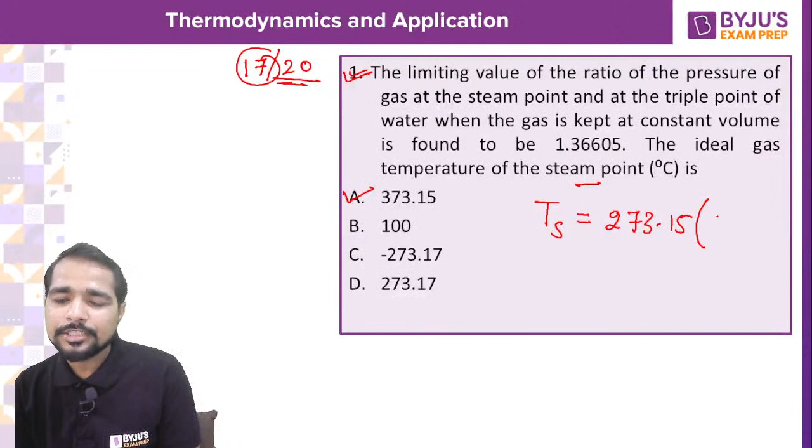These are few points I have just written. So when you will solve this problem, the ideal gas temperature of the steam point, first of all, I'll give you the answer. So temperature at the steam point must be given like this: 273.15 into P at steam point divided by P at triple point. If I write the entire value, then this value will be equal to 273.15 and this value is 1.366 something. So if I write the value, you will get the answer like this,

273.15, right? But again, very carefully, just read the last line of any numerical. Spider-Man, galat hai answer. Ankit, absolutely wrong answer. Because when you calculate the answer with the concept of triple point, then answer in the final form is in Kelvin. But in this question, it is asked in degree centigrade. Can you tell me the answer? What is the correct answer? Spider-Man, change your answer. Parvinder, change your answer. Ankit, yes, change your answer.

So always when it is a numerical problem, then focus on the last line of the question specifically. Last line जो आपने लिखी है उस पे जरूर फोकस करना, otherwise you are going to do a mistake in the question. Definitely chances हैं. Okay? Yes, Ankit, Parvinder, very good. Yes, Spider-Man, very good. B is the correct answer. A is not a correct answer. These few mistakes you have to minimize, right? If you are going to prepare for the BARC exam.

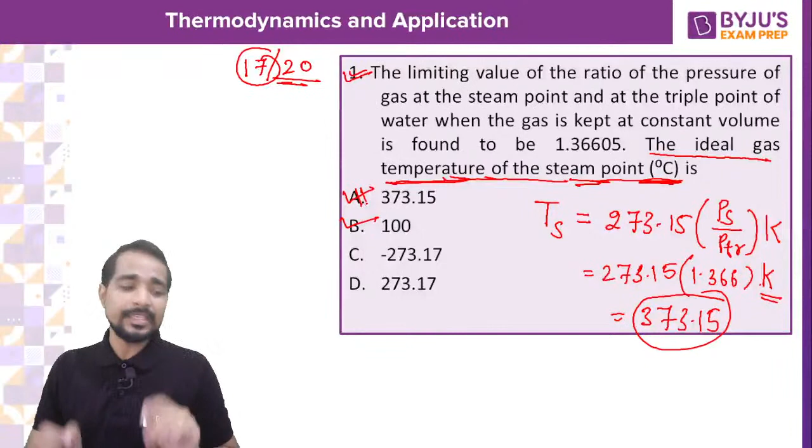और ये 7 दिन ही है. In next 7 days you need not to study much more other than the syllabus what exactly you have studied. Maximum time आपको जहां से जैसे मिले, Spider-Man, do the practice only, solve the number of questions only and just start to get few points from your mistakes. ये मुझे पता चल गया हर न्यूमेरिकल क्वेश्चन में लास्ट लाइन मुझे बहुत जरूर पढ़नी है.

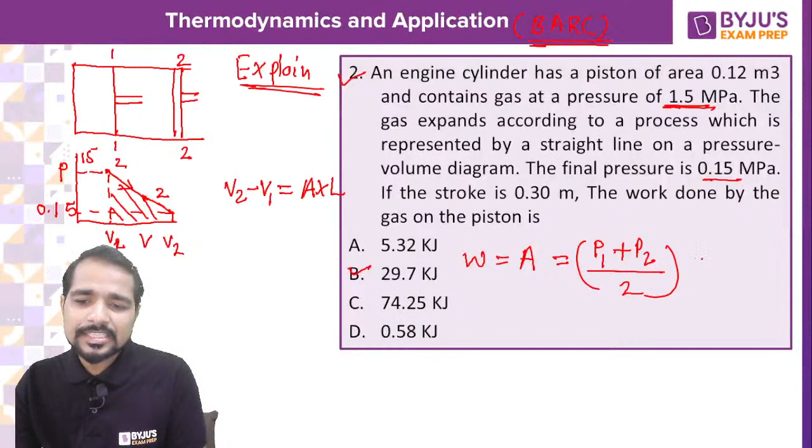And this can be written as P1 plus P2 divided by 2, into the change of volume, that is V2 minus V1. I am damn sure that when you calculate this numerical portion, you will get B for Bombay as the answer. ठीक है, B for Bombay is the answer.

So after that, देखो चलो ये क्वेश्चन गया, but the next star point that I have written must be clear to all: if during the reading of the question you are not going to solve it, just write in the comment section only this comment, "explain", and I'll get the idea that you have skipped this question, right?

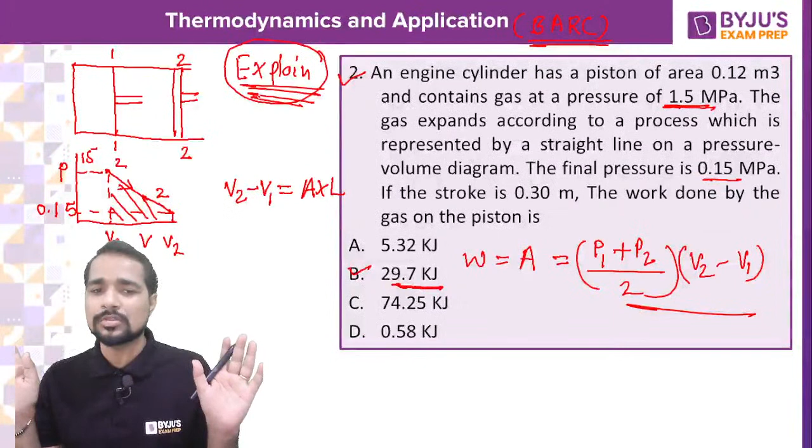Okay, next question. Very easy question, but again these are very conceptual questions. I want the answer from all of you on this one. Write the answer in the comment section. Just like the session, my dear, and after that write the answer. Spider-Man, this is the answer for question number 3 or question number 2.

This question is related to the first law of thermodynamics. So I have discussed a few important questions from the first chapter, that is, the basic concept of thermodynamics. In that, I have discussed questions related to work done, and also questions related to the zeroth law.

Yes, Parvinder. According to Parvinder, A is the answer. बाकी लोगों के आंसर क्यों नहीं आ रहे? Again, we are going to discuss the BARC series, my dear, and I know you are going to write the absolutely right answer.

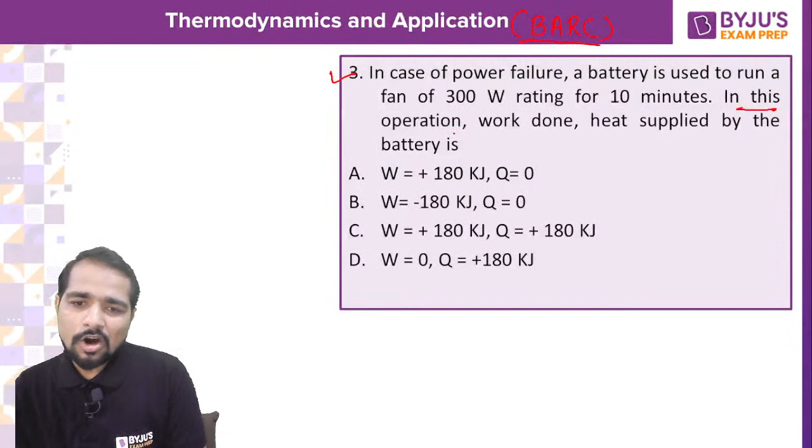Very good. Okay. In this operation, what is the work done and heat supplied by the battery? This is the question. In case of power failure, a battery is used to run a fan of this rating for 10 minutes. Then what is the work done supplied by this? What is the heat supplied?

Shivam Tiwari, very good. If I replace this entire problem with a real life system, this one is the battery, and the battery is completely used to run a motor, which is used to run a fan. So if the question is asked to you, you will consider that this is the system, and anything external to the system is the surrounding. So this is the system, and this one is your battery.

Okay, battery. So what is the power required? The energy required to run the fan is 300 into 10 into 60. So the answer is 180 kilojoule. This is okay, but you need to decide whether your battery, your electrical wire, all these things supply work or supply heat. It's a very important point.

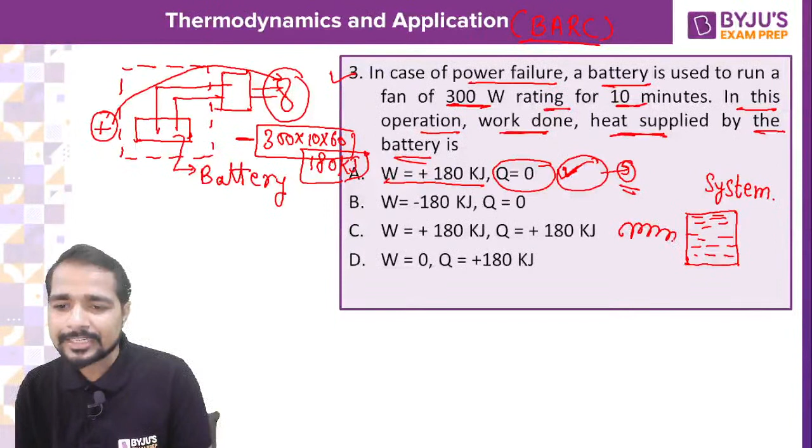System, and water is filled like this. Omkar, I am not getting your answer. Shivam, I am not getting your answer. If the same question is repeated for the fan, and this one is the electrical wire like this, and this one is the battery like this, my dear. Okay, yes, very good. Yes, at that time you will select answer is equal to this B for Bombay.

If the same question will be asked, then the same energy is used to heat an insulated system like this, then out of all the options, what is the right one? The same question is repeated. Right now it is not used to run the fan. Right now the battery is used to run the heater, and heater is used to heat the water. Then the same question is asked, what is the answer for this particular system?

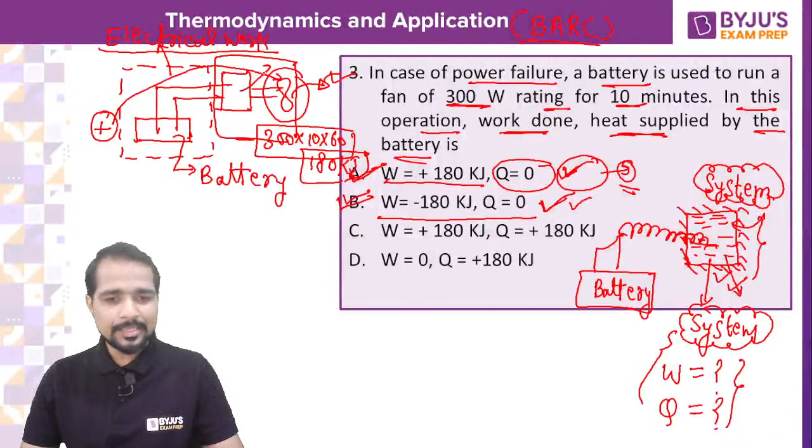Related to first law of thermodynamics. Write the question number 4 related to first law of thermodynamics. Next,

For the next 1.5 or 2 hours, be present with mind and heart also. Sit with full dedication, all of you.

Yes, write the answer. If you will not be able to feel the exact subject or exact topic, then definitely you will feel the problem in numerical solution.

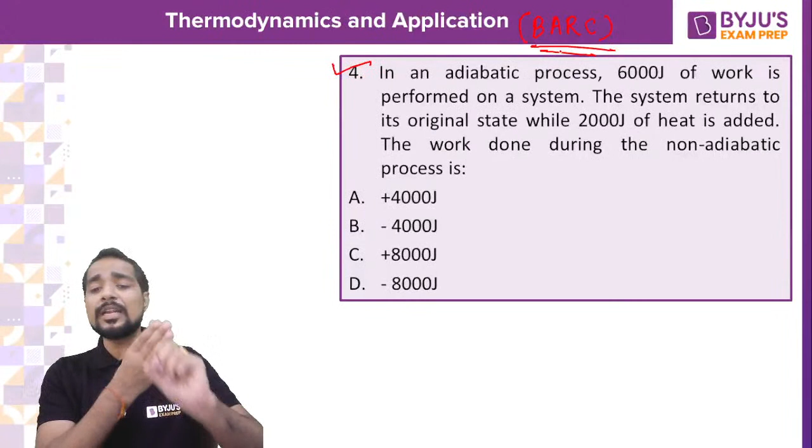3 important points I have also given you in the starting of the session. We are going to discuss the BARC exam, that after 7 or 8 days, if you are going to write the BARC exam, then 3 important points you need to focus on. What are these 3 points?

First important point, write the answer. During reading the question you have to decide, I am going to solve this question or I am going to skip this question.

If after reading the question it seems like this question is nothing difficult, then understand you will solve the question, otherwise skip that question in the first attempt. This is the first important point I gave in the starting of the topic.

This is the question purely related to a cycle. What is the meaning of cycle in adiabatic? Because it is written that the system returns to an original state.

If the system ever returns to the original state, then the system's answer will only and only be a cycle. This is purely related to a cycle. When the initial and final point will be the same, my dear, then definitely it's a question of a cycle. Very good, Shivam. I am quite happy.

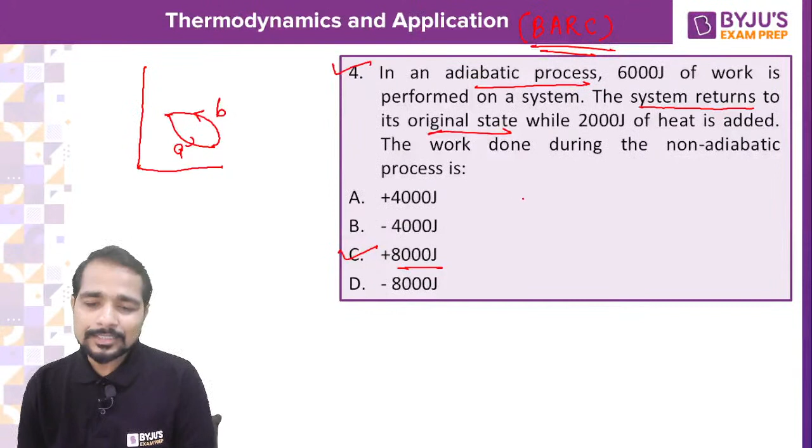So again, it will start from here and it will return into this condition. There are 2 processes, A and B. And what are the valid formulas for the cycle? For the cycle, it must be like this. This for the cycle will be valid like this.

We have written this now, because change of internal energy will be the same, right? This is A, this one is B. What A means, I'll say adiabatic process. What is the heat transfer in adiabatic? Zero. What is the heat transfer?

Or you can, let it go, let me tell you a very simple funda. Don't apply any formula. Without knowing the formula, write the answer, right?

Leave it, see what is the work done in a process? This is 6000 and this is on the system. This is minus 6000 is the work done. Okay, what is the total heat supply to the system? Total heat supply to the system is 2000 and total heat is supplied to the system.

You will take this point as plus. So total heat supply in the system, or total heat interaction, is 2000 plus. Apply Joule's law: if total heat transfer is 2000, total work transfer must be 2000 plus. But in the first process, this is minus 6000. So what will be the work done in the second process? That total must be plus 2000.

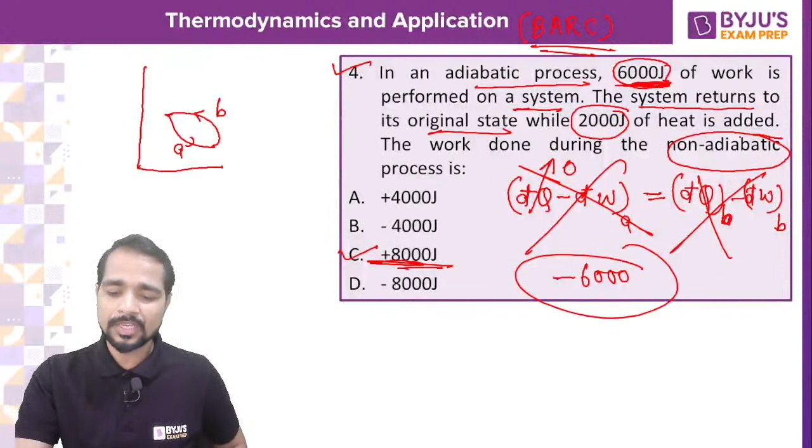Like in the session, this was a very important question. Maximum of you got the answer wrong for question number 4. Reason: you tried to solve this question with the help of a process. Champak.

Try to solve this question. I think this is one of the easiest questions of this session, and definitely I have written this type of question in this PPT purposely. Reason: all questions in the BARC exam are not very difficult. A few questions are very easy. So you need to identify that these type of question I am going to solve first.

Right? Praveen, Parvinder, what is the right answer, my dear? Very good, Shivam, very good. Question number 5, answer you say sir C is the answer, according to Parvinder she is right. Anyone else?

This is completely about series of work. And again, write the answer according to Parvinder. So C is the answer. Anyone else? Okay, 175, Spider-Man. Very good.

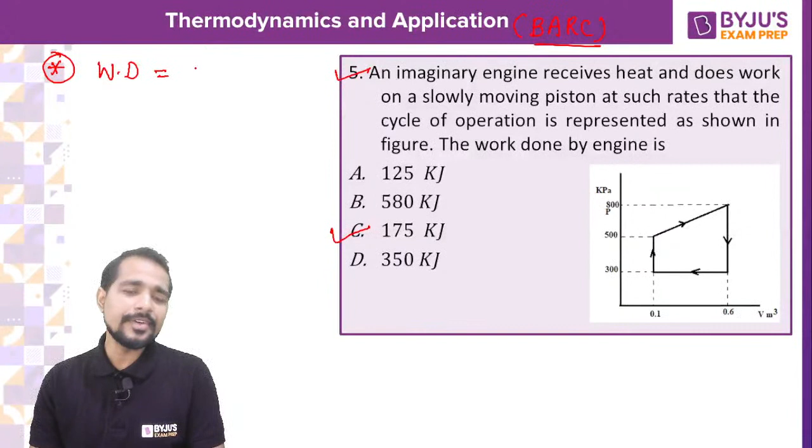Okay, area of the trapezoidal is the answer. This is again based on a simple star point where we have written that work done of a reversible cycle is the area of the closed cycle, simple. So again, I have only written this question so that you will decide that these type of question are not going to be skipped.

Sir, numbers are not clear from the cycle. Let me write: this one is 500, this one is 800, and this one is 300. This one is 0.1 and this one is 0.6. And again, if you calculate the area of this one now, you will get the answer.

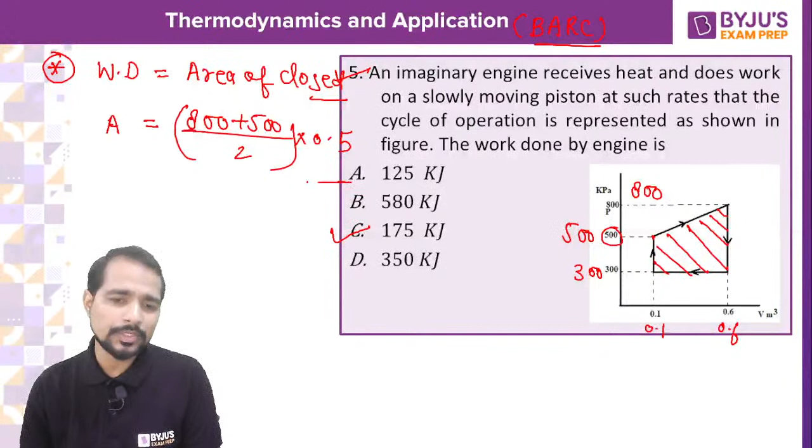So I think I need not solve this question. You have just calculated the answer. I need not discuss this question in very detail, right? 500 divided by 2 into 0.5. Absolutely right, very good, absolutely right answer. C for Chennai is absolutely right.

Great, Omkar. Don't feel that BARC will not ask theoretical or conceptual questions. 15 to 20% of questions you will see like this. And again, you are not going to escape questions like this. Conceptual, theoretical questions you are not going to escape in the BARC exam. Because if you skip these questions now, then definitely you are lagging somewhere. Reason I am going to tell you: numerical will take so much time, but these questions you just need to read and write the answer only, right?

Shivam Tiwari, what is the right answer? Omkar, what is the right answer? Parvinder, what is the right answer? For the GATE exam as well as for the BARC exam, you are not going to skip these type of questions, right? Even in the GATE exam these questions are 1 mark questions. So this is up to you. If you don't know you can skip, but in BARC if you skip this, then definitely you will be in trouble.

Because you are all mechanical engineers, and the focus of mechanical engineers is only to solve numericals, because you are all Champak and Gajodhar. Okay, yes, according to Parvinder sir A is the answer, maybe. According to Omkar sir D is the answer. According to Parvinder, A and D both are the answer. Okay, yeah sorry, this one is more, this is not less, this one is more.

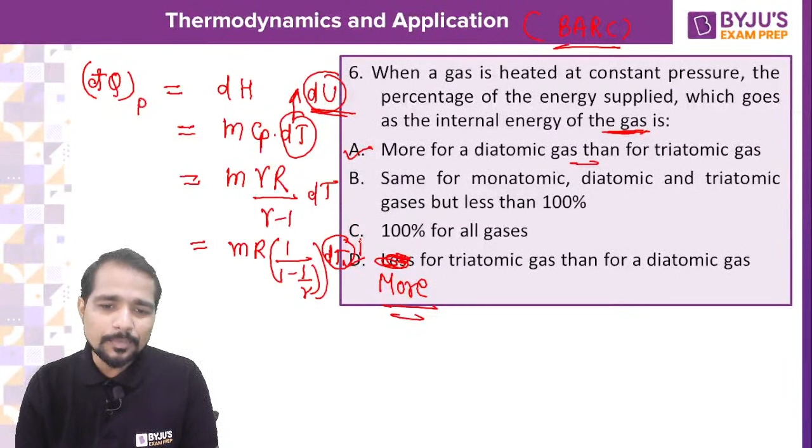If I again substitute the value, then M and R, okay. So if I write this, the value will be equal to 1 minus 1 by gamma, and this is dt. So if you want this value to be more, this value is more because the same heat supply in the isobaric case you have, right? So if I solve this entire problem, then del Q in isobaric process into 1 minus 1 upon gamma divided by MR, that is equal to dt.

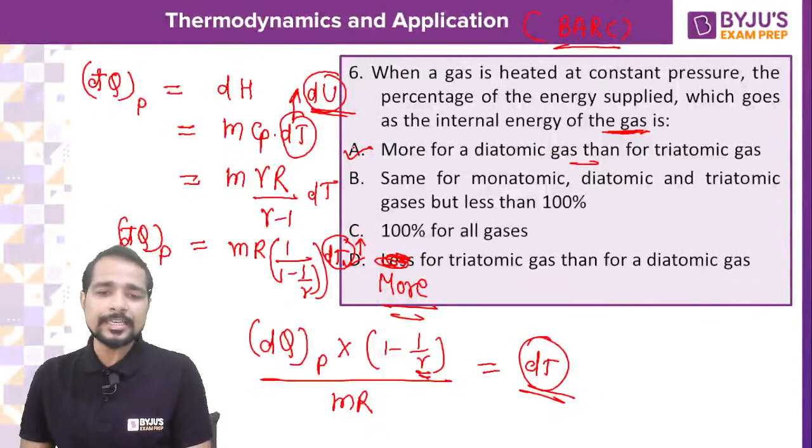So can you find the answer? If you have a higher value of gamma, you will have a higher value of change of temperature. So if you will have a higher value of change of temperature, answer A for Ahmedabad is absolutely right. Okay, great.

Very, very important question. Most important question. These type of questions are confusing. If you are not damn sure in these type of questions, then don't try them. It will be better to skip these questions, because if you will solve this question now, you will get a number of answers, and you will feel maximum number of them are absolutely right.

Because in the exam, your focus is not to select the right answer, your focus is only to match an option. You all are the Champak, I know very well. Shivam, what do you say? Omkar, if one option from any calculation is matched, then blindly you will take that answer.

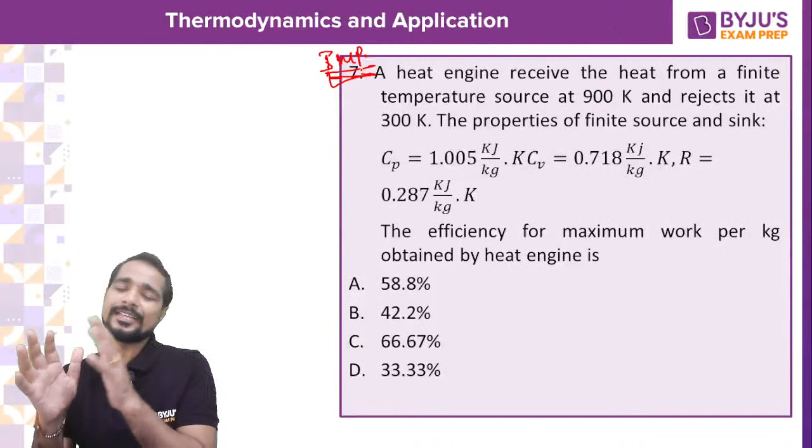What is the right answer? The efficiency for the maximum work done. Maximum work done. Yes.

Kumar, what do you say? Yes, according to Kumar, sir, question number 7, answer is B for Bombay. Maybe. Sorry, Parvinder, according to Parvinder sir, B for Bombay is the answer. Anyone else? Spider-Man sir, C is the answer. Even you can select all the answers, because few of you will get B, few can get C, even D you can also get, and only one option is absolutely right. Shivam, very good. According to Shivam, it's B that is the answer.

Correct? Yes. Let me tell you, when you write the maximum efficiency, that is equal to 1 minus T lower upon T higher. Okay, T lower upon T higher. So this is the efficiency of the Carnot cycle. This is also the efficiency of source and sink when these are infinite temperature source and sink, right? Meaning you take any amount of heat, source and sink temperature is not going to change, but this is written in very bold words, right?

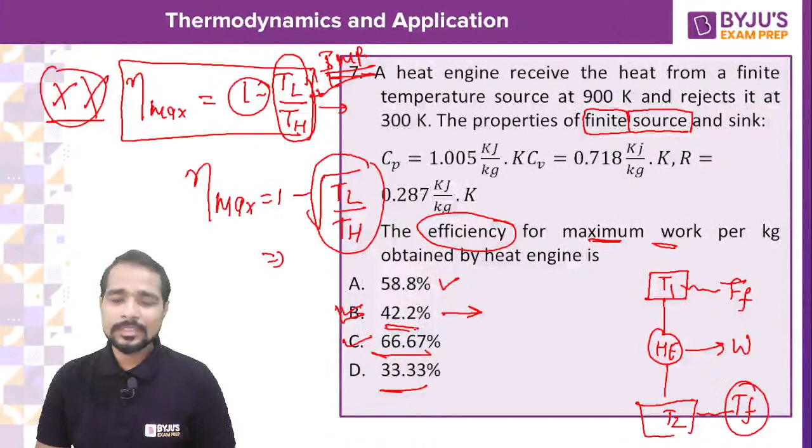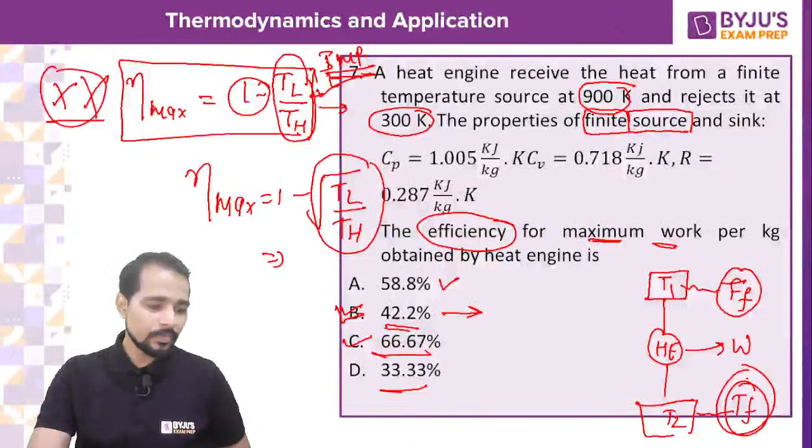Parvinder, 519 is the maximum temperature? No. 900 is given, na? 900 is given, and this is given. 519 is not a maximum temperature. That is the mean temperature, not maximum. That is the mean temperature between the source and sink. Or I'll say that is the final temperature at which heat supply and heat rejection will be closed. Okay? For maximum work. Yes, absolutely right. Question number 8.

Again, I instruct these types of questions should not be skipped by you during the exam. These types of questions only will make the difference, my dear. You have to select which of the following statements is not correct related to entropy. After the first law of thermodynamics, I have started the topic of entropy and the second law of thermodynamics.

Very good, Shivam. Very good, Parminder. Shivam, Spider-Man, yes. Yes, can you write in the answer? Great. Yes, B is the answer according to Parminder. I am quite happy. B is the answer.

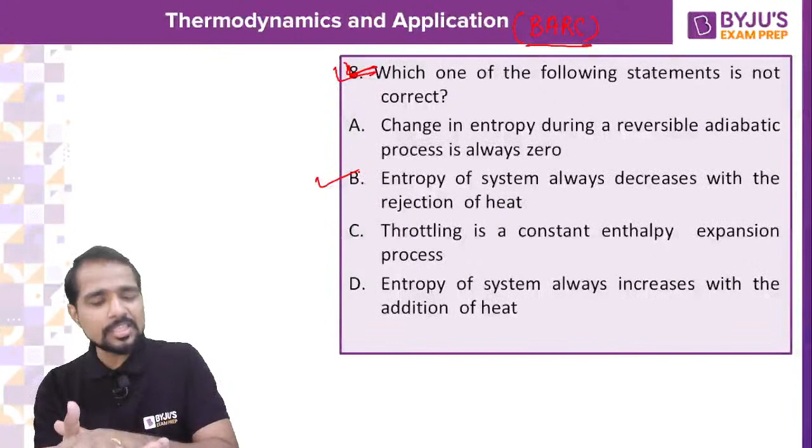Great. And this one includes reversible processes and irreversible processes also. All reversible and irreversible processes are included in entropy, and you must know entropy is a point function. So again it must be valid between 2 points only, right?

Very good. Surya, according to Surya sir, B is the answer. Maybe, right? Be honest with yourself. Okay. Yes, Nishad, C is the answer, sir. Simon, sorry, B is the answer. Simon, no need to. If you have written by mistake, then it is okay.

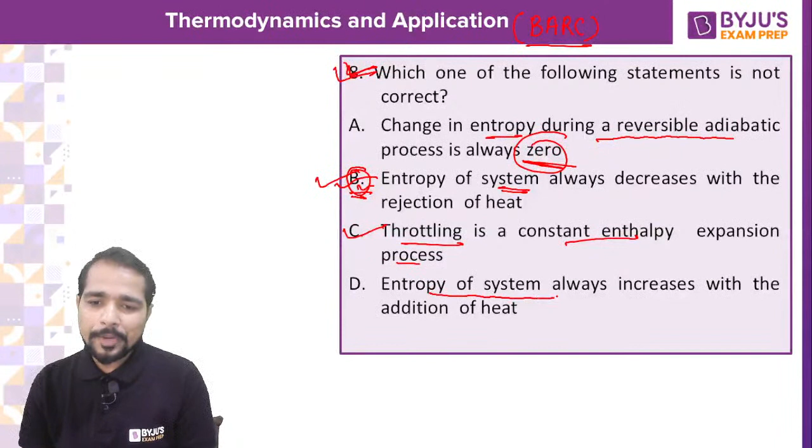Rama, very good. So yes, it is absolutely the right answer. See, change in entropy during an adiabatic reversible process is 0. Absolutely right. Throttling is a constant enthalpy process. Absolutely right. Entropy of the system always increases with the addition of heat. Absolutely right. But entropy of the system always decreases with the rejection of heat. That is not absolutely right.

If you want that particular process, I can explain here, right? Even in the heat rejection process, an irreversible heat rejection process, entropy may increase, may decrease, and may be constant. And this is the star point, where we always write that all reversible adiabatic processes are isentropic, but all isentropic processes need not be reversible adiabatic processes.

Have you heard this? If you have just heard this, then definitely you will get the idea. This point is only for this statement, that entropy for an irreversible heat rejection process may decrease, may increase, or may be constant. How? This is the important line: entropy change for the irreversible process is written like this, the heat term, plus entropy generation. So this is the entropy change of any system.

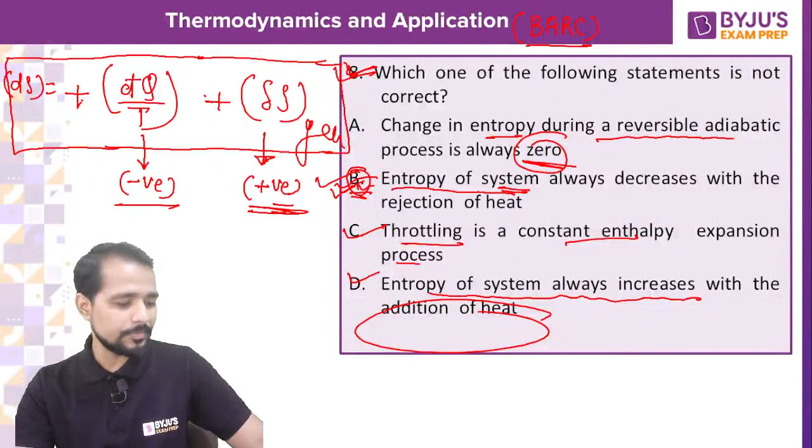Yes, great. So the answer of this question is B for Bombay. Yes, again you can expect one question related to diagrams. Diagram means you have to convert a few PV diagrams into TS diagrams.

ठीक है ना निशत, you have to convert number of PV diagram into the TS diagram. ठीक है, ओके परविंदर, यस, राइट. आपके कमेंट थोड़े लेट आ रहे, ओके, नो इशू.

Yes, so at least one question you can expect, as the weightage of thermodynamics is quite high in the exam of BARC. Right, because maximum number of engineers will make a mistake converting the diagram from PV to TS, because there are 4 to 5 cycles like Otto cycle, Diesel cycle, Brayton cycle, Carnot cycle. आप उसको क्या याद कर लेते हो. These are all the cycles and we try to fight for all these cycles. अब हम सब उनको याद कर लेते हैं, but again there is a proper method to convert the PV diagram into TS diagram.

Shivam, you say sir B is the answer, C is the answer. Okay, Parvinder, C is the answer. Spider-Man, C is the answer. Maybe correct. Yes, Kumar, C is the answer. Surya, C is the answer. Great. I need not discuss this thing. Okay. Remember these 2 points.

First star point you will write, sir, all the reversible adiabatic processes are isentropic processes, either compression or expansion. Then if the reversible process is shifted into irreversible, then all the TS diagrams will shift in the rightward direction. If this is the expansion process, the diagram will be shifted like this. Reason, if you convert reversible into irreversible, then definitely entropy will increase.

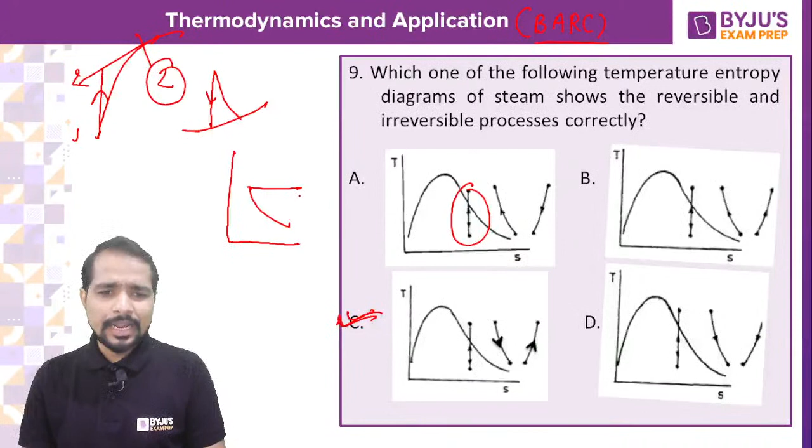Yes. I need to add a few more figures related to PV and TS diagram, but I have approximately 10 to 15 cycles जिनका नाम भी नहीं पता है आपको. ठीक है, मतलब अपने को भी नहीं पता है. There is a champak, he just comes and draws 3 important lines. पता नहीं कौन से प्रोसेस है. But again you have to convert all these processes on TS diagram.

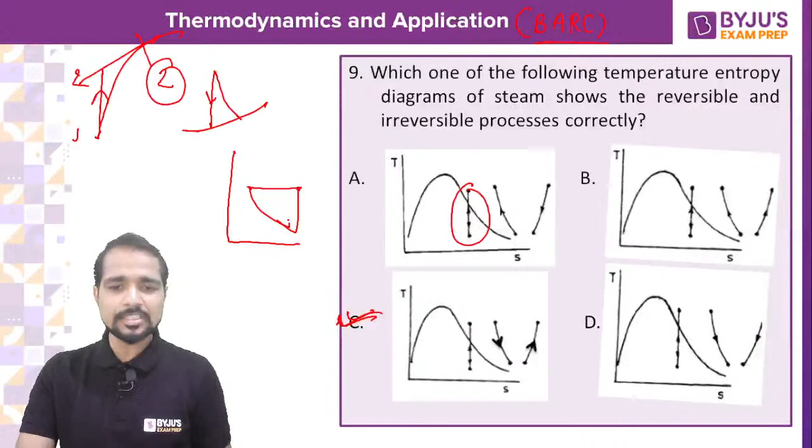Yes. These are formula based questions. Few formulas in the GATE exam and also in the BARC, ISRO and DRDO exam, because after BARC exam fight for the DRDO exam. ठीक है? Don't wait for a single day. Fight for the DRDO exam.

So there are a few points for which we need to memorize the formula. सिर्फ formula उनके रट लो. Like in the thermodynamic relations chapter, you need to memorize formulas only, like Clausius inequality, like Joule-Thomson coefficient formula.

So most of the time you will feel in the exam that either the question is directly formula related or it is not given. Reason, these types of numerical questions were not asked until now. These questions started 2-3 years back. Because it is the start, the chances of formula based questions are more. So yes, C is the answer according to Omkar. C is the answer according to Parvinder.

Anyone else? अच्छा एक कमेंट लिख सकते हो कितनों को नहीं आता है क्वेश्चन. Okay, so according to this Clausius-Clapeyron equation, the slope of the PT diagram is simply equal to hfg divided by T saturated into vg minus vf. Again, the specific volume is given, hfg.

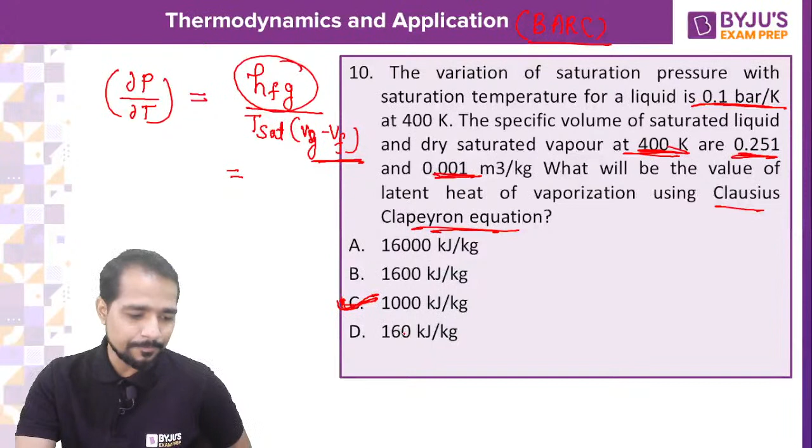hfg we need to calculate. And slope is given to us, 0.1. We substitute all the values. If the Clausius-Clapeyron equation is known to you, then definitely you will solve it. Yes, exactly, Parvinder. Very important question. These are the part of thermal we generally skip.

A mixture of ideal gas has the following composition by mass. Very, very important question, I'll say.

And don't say, sir, why you are going to solve the number of numericals, because the majority of the questions are related to the numerical part. Sir, what are the limitations of the Clausius-Clapeyron equation? The first limitation is this is valid only for the phase change process. You can't apply this one. Correct? Yes, yes. Okay, Omkar, your answer is absolutely right. Good. Great.

Anyone else? Very good. 10C. Rama, what is the answer? Parvinder, what is the right answer? Very good. Great. According to Parvinder, C is the answer. Yes, Kumar, C is the answer. I think I need not write it again. First of all, I'll write that overall.

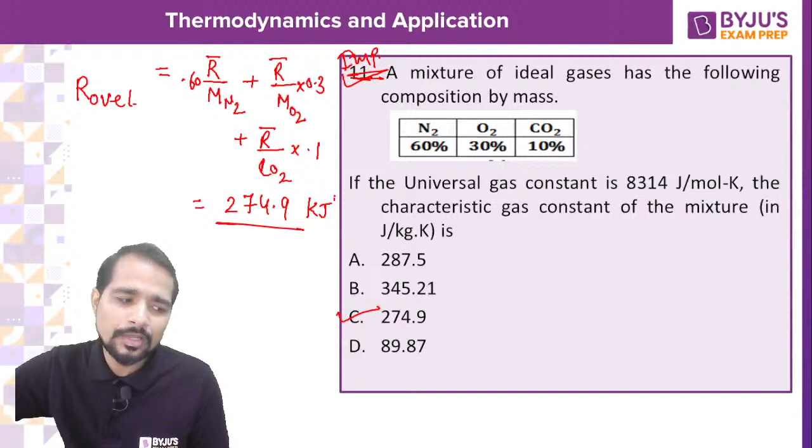You can ask me, sir, what exactly have we discussed here? First of all, I have converted the universal gas constant into the specific gas constant because these percentages are mixed. And all the formulas related to the specific gas constant, like Cp overall will be equal to M1 Cp1 plus M2 Cp2 divided by M1 plus M2. And what is this term? M1 divided by M1 plus M2. This is the percentage contribution of Cp1, and this is also the percentage contribution of the second gas. Correct? In the same way, you can write Cv.

In the same way, you will write gamma, but when you write gamma, don't write it like this: gamma 1 M1 plus M2 gamma 2 divided by M1 plus M2. Don't write like this, because the value of gamma is purely related to Cp and Cv. So overall gamma will be written like this only: M1 Cp1 plus M2 Cp2 divided by M1 Cv1 plus M2 Cv2, equal to Cp overall divided by Cv overall. Solve the problem of gamma like this. Okay, the point of Cp, Cv, gamma overall and R overall, I think it is clear to all.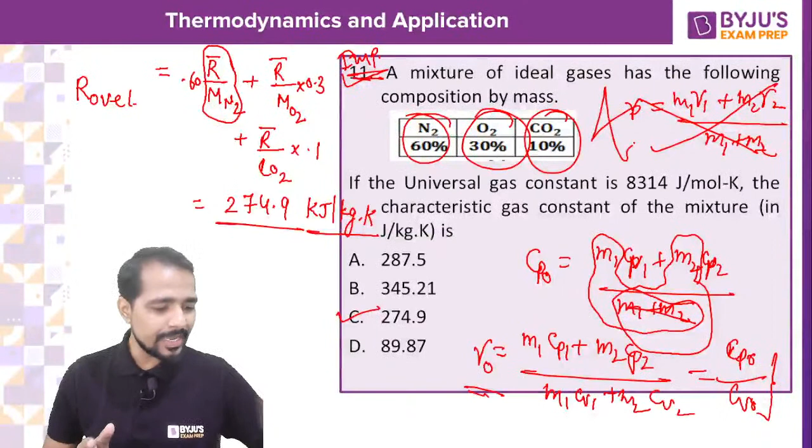Rama, say yes or no? Surya, what do you say? Kumar, okay, great. Yes, very important question of irreversibility. Very important question of irreversibility. Correct. Yes, irreversibility.

Even though this question is easy, it will take a lot of time to solve. Rama, you will take a lot of time to solve this question. So these types of questions you must decide on. You will see a few easy questions, a few theoretical questions and a few numerical questions, but these questions will take so much time. So this point must be clear in mind: during the reading of the question, I'll skip this question and solve it later, this question I'll solve right now, and this question I'm not going to solve anyway.

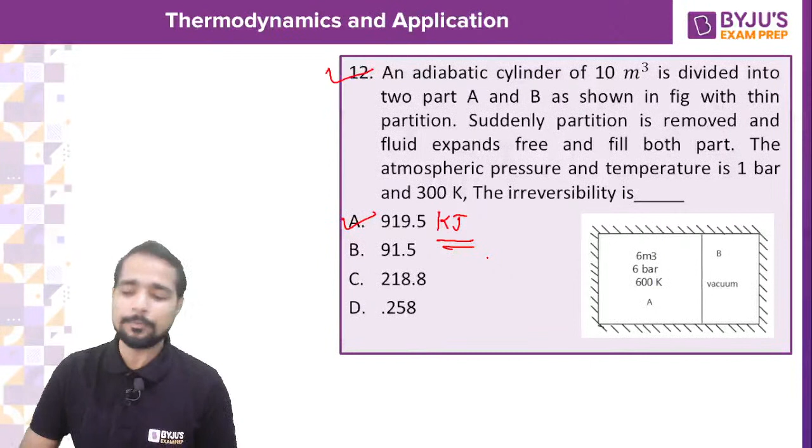Yes. After the solution, I'll discuss a few important points. After this entire question, I'll explain the physical significance of irreversibility, or losing the capability to do work. You can say it in this way. I'm not getting it? That is the important point you need to write. If you don't understand, it is okay. So the point of irreversibility, this is simply based on the formula, my dear.

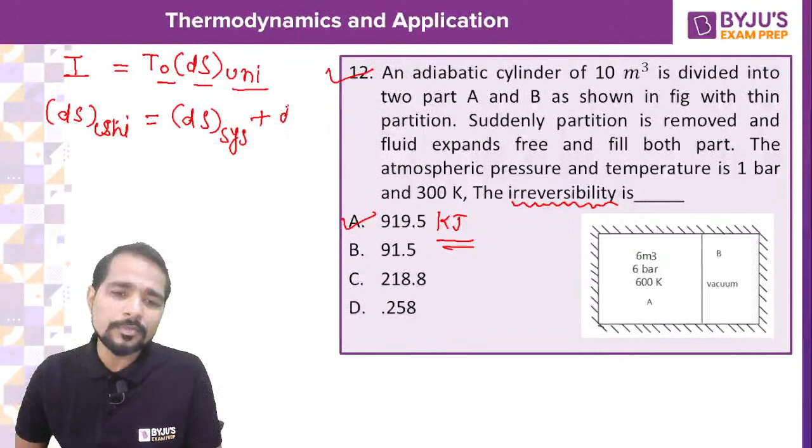What exactly I need to calculate? You need to use the calculator and give me the answer before any calculation. We have written this point. Okay. So after that, T0 is okay, but this one is the dS of the universe. So what will be the dS of the universe? dS of the universe will be equal to dS of the system plus dS of the surrounding. dS of the surrounding you can write as 0, because the surrounding is completely insulated.

After that, in the system there are two parts, my dear. So for the system you will write the change of entropy of part 1 and the change of entropy of part 2, but there is nothing in part 2. So the change of entropy of 2 will be 0. So the change of entropy of the universe will be equal to the change of entropy of part 1. So this part's change of entropy will be exactly equal to the total change of entropy. So what is the total change of entropy in this question?

What will the total change of entropy be? Again you will apply the ideal gas equation, written in the form of temperature and volume, my dear. So in this case it will equal mCv ln T2/T1 plus mR ln V2/V1. If I solve this, Cv and R are the terms, but T1 and T2 are the same.

In free expansion process, the value will be equal to mR ln V2/V1. mR will be equal to P1V1 upon T1, and V2 means after the expansion what is the volume of the first part. Substitute the value of P1, V1 and T1. And the final answer of irreversibility will be equal to T0 into dS of universe, where T0 means atmospheric temperature, that is 300. This is your numerical you have solved.

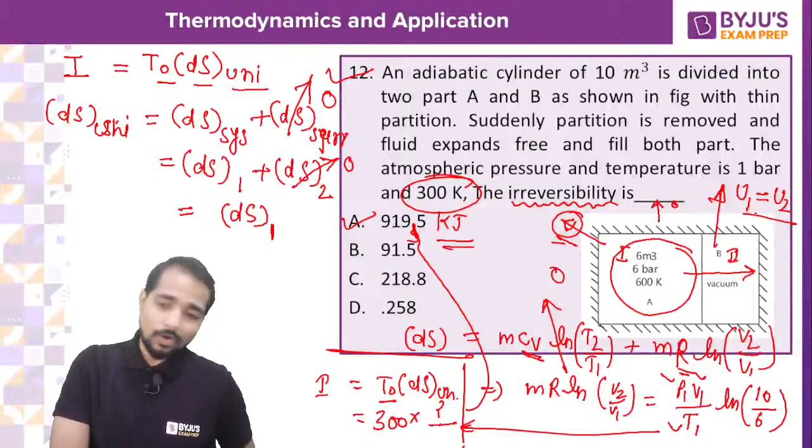So my point is this: if initial and final energy are the same, but according to this question there is a loss of energy due to irreversibility, don't you feel these two statements are contradictory? You say the total energy of the system remains the same, and second, there is a loss of energy due to irreversibility. And yes, both statements are right, and from this point I'll give you the exact feel of irreversibility, of exergy and energy.

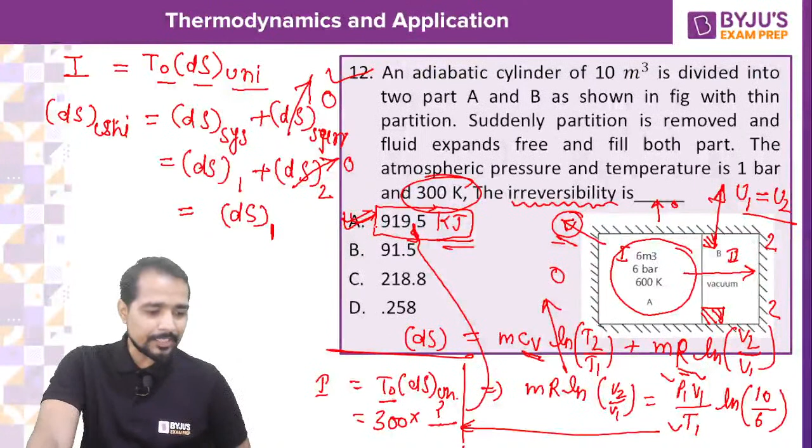If you have got the exact idea, send me a fire symbol. It should be fire, I've been telling you from the first lecture. Yes, if you have got the exact physical significance of irreversibility or loss of energy. Very good. Great Parvinder. Rama, have you got the idea? Yes. Try to solve the next question. Very good. Great. Great, Nishat. Absolutely right. Good. Next question.

A gas power plant working on a regenerative Brayton cycle. These are the points we generally skip during conventional or traditional study like notes revision, right? These points we generally skip, my dear. Okay. Yes, very good, Rama. Great, Nishat.

Don't take more than 1 minute to solve this question. Parvinder, I am quite happy that you are going to write the answer. You have command on time also, right? To get the answer is one thing, but to get the answer within the time limit is a different thing. Very good, you all are doing great.

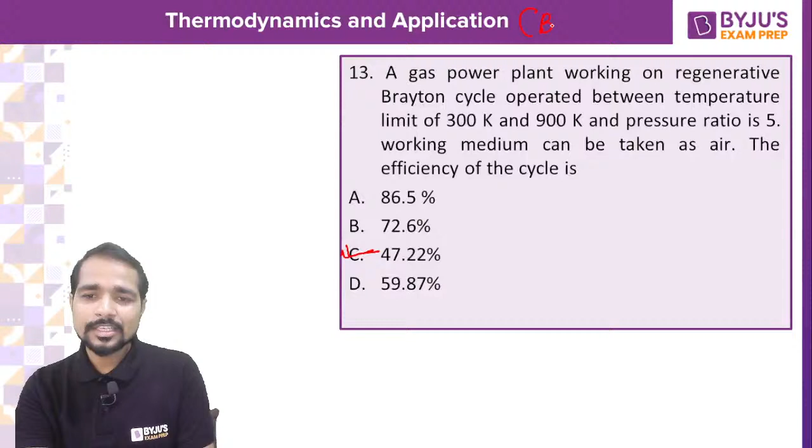Yes, Omkar, great. C is the answer. Have a competition between yourselves, who can answer quickly and correctly, and you need that same competition in the examination hall during the actual exam. Very good, Spider-Man, absolutely right. Yes, C for Chennai is the right answer, very good.

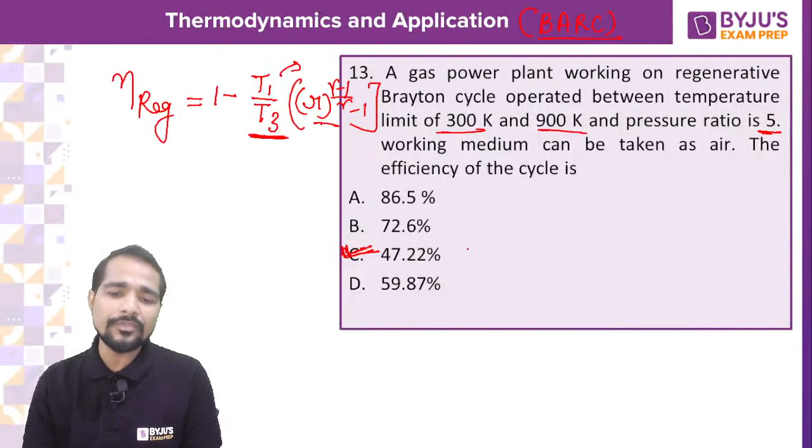I need not discuss this answer further, just write one option: regenerative efficiency is different from the simple Brayton cycle efficiency. Regenerative Brayton cycle efficiency is T1 divided by T3, and R raised to gamma minus 1 upon gamma, minus 1. The value of T1 is 300, T3 is 900, and r is equal to 5. When you substitute the values, you get answer C for Chennai as correct.

Okay Surya, great, yes. So in this case, Kumar, absolutely right. I want the answer from all of you. Yes Omkar, absolutely right, Nishat, absolutely right.

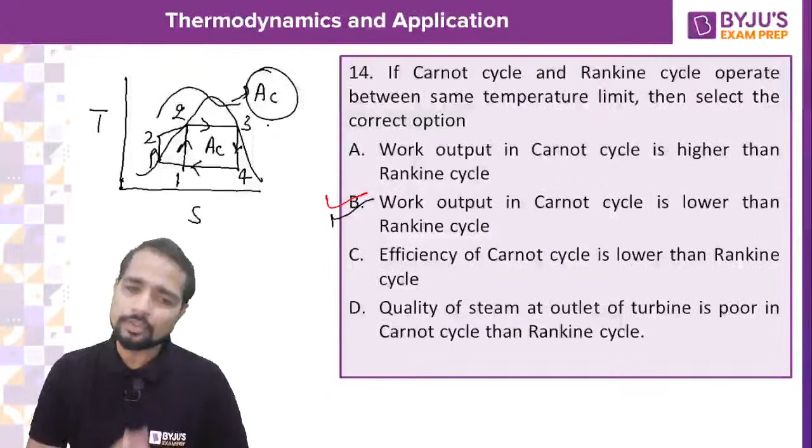Low grade energy is supplied in the Rankine cycle, because the mean temperature during heat supply in the Rankine cycle is lower compared to the Carnot cycle. So the mean effective temperature is lower, meaning low grade heat is supplied in the Rankine cycle. So efficiency of Rankine is lower, but work done of Rankine is higher. To conclude: efficiency of Carnot is higher than efficiency of Rankine, but the work done of Carnot is lower than the work done of Rankine.

You will write it like this, and the next point also like this: mean effective pressure of Carnot is higher than mean effective pressure of Rankine. These are the points you can write, my dear.

One more important point you must know: why the Carnot cycle is in pure substance, and what about the quality of steam in both cycles. If you supply heat at higher temperature, then the quality of heat you are supplying is higher. And if you reject heat at lower temperature, you are rejecting heat of lower quality. If you have higher quality heat, it has higher capability to do work, so the amount of work done will be higher. Higher quality of steam means higher dryness fraction; maximum quality of steam is 1, minimum quality of steam is 0.

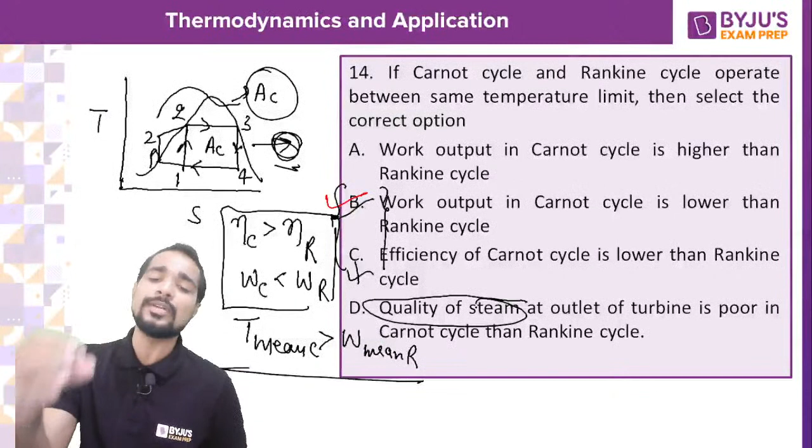If you say quality of steam is higher, it means dryness fraction is higher. Quality means quantity of vapor, saturated vapor. Lower quantity means lower dryness fraction. I hope you understood this.

Tick the answer fast. The nozzle angle of Parsons reaction turbine is 20 degrees. What is the efficiency? Nishat, I hope you have got the point.

I thought it was quality of heat. That is the reason I explained it, since I could not read that statement clearly. He asked about the quality of steam, right?

Generally, quality of steam is asked or considered at the outlet of the turbine after the expansion process. If we see the expansion process, that is 3 to 4, this is the same for both the turbine or both the cycles. That is the reason for both cycles the steam quality will be the same. We don't bother about any other point, only the outlet of the turbine, because steam quality affects the blade of the turbine at the outlet. That is why we always think about that point.

Okay, yes, Omkar is the answer. Parvinder, you say B for Bombay is the answer. Maybe. Anyone else? Correct, these are the questions which will confuse you.

In the question it is written that it is the Parsons reaction turbine, or you can say it is the De Laval turbine, or it is the impulse turbine, it is the perfectly reaction turbine. Number of formulas are given to us. We need to select a proper formula at the time.

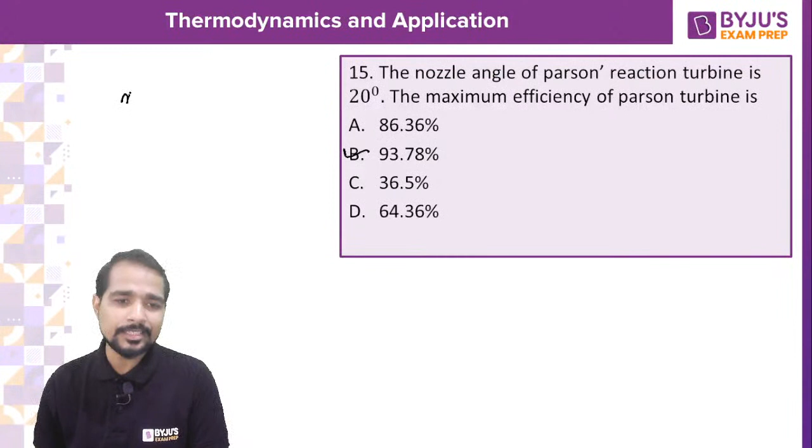So maximum efficiency, if you write it, is generally written as cos square alpha. But this is not for the answer, this is for the impulse turbine only. When I write the actual value, actual value will be equal to 2 cos square alpha divided by 1 plus cos square alpha. When I calculate the answer, then B for Bombay is the right answer.

Bombay, yes, Rama, Spiderman, Rajiv, absolutely Rajiv. Rajiv, why did you join so late? Rajiv, good afternoon, okay okay.

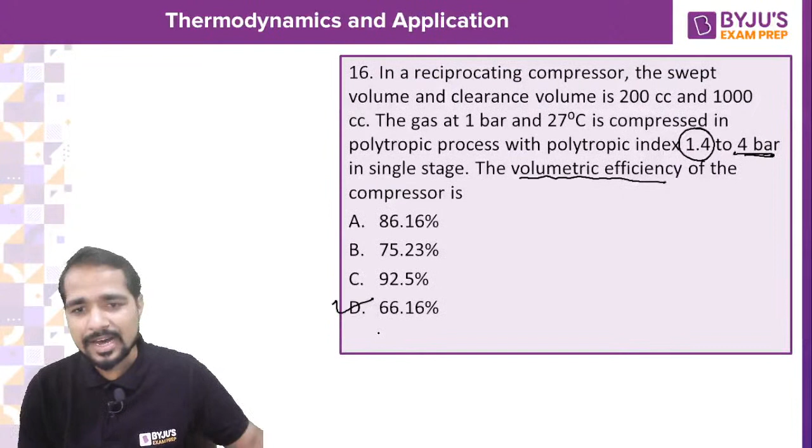This is the session for the BARC exam and GATE exam. Okay, absolutely right, D for Delhi is the answer.

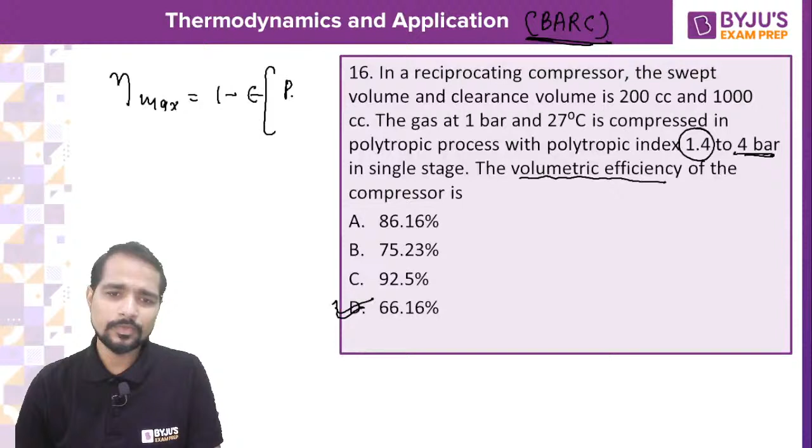So again, what is the efficiency of this one? Efficiency will be equal to 1 minus clearance ratio times P2 upon P1 raised to 1 upon gamma minus 1. If you calculate the answer, you will get the exact answer. Clearance volume ratio is equal to clearance volume divided by swept volume. So if you calculate, the exact answer is D for Delhi.

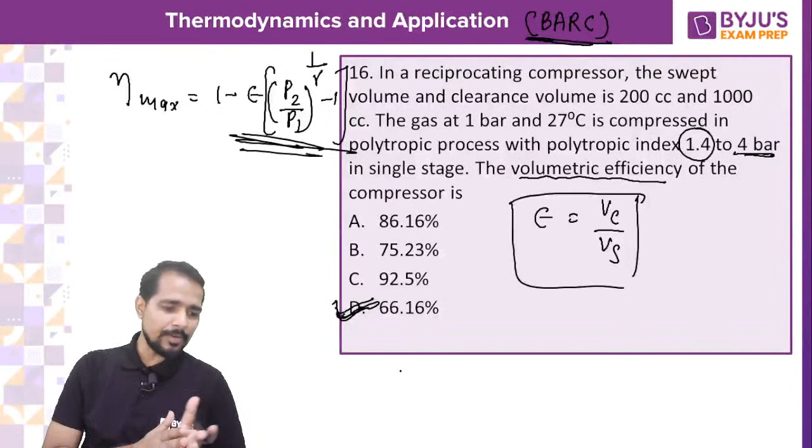Parvinder, absolutely right, yes or no? Kumar, are you getting the same answer? Rama, very good, very good. Yes, correct.

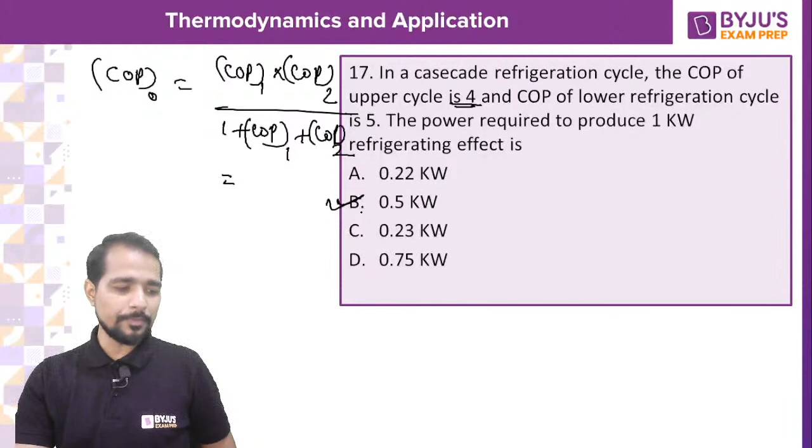Great. Yes, B for Bombay you have written. Absolutely right answer. Question number 18.

You need to solve this question at home. This is your homework. Again, I'll suggest you need to solve these type of questions. These questions are very easy. Hardly you need to apply 1 to 2 lines, but when you will see the pure substance question, then definitely you skip. You need to write only 1 to 2 lines, you will get the answer. So I'll give you this question as homework.

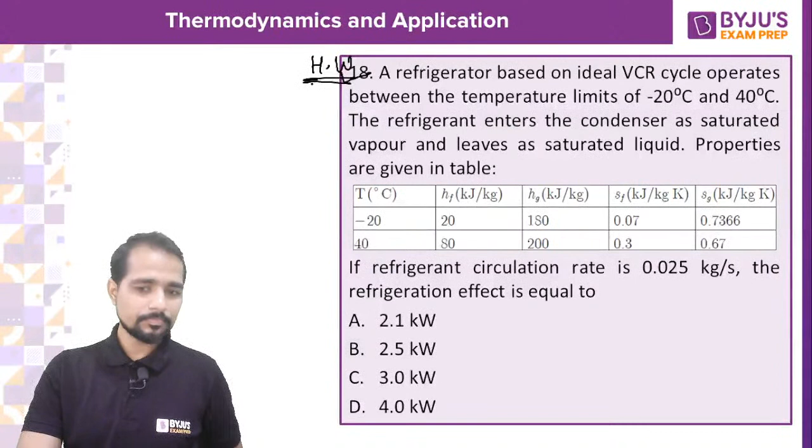Okay, Rama. Question number 19 and question number 20. Okay, Rama, yes.

Question number 19 and 20 you need to apply. Very good, Parvinder, you have already written A is the answer. Okay, most probably, it's just a guess.

So again, there are two things to ask here. First of all, what is the total enthalpy of the dry air? First of all, total enthalpy of the dry air you need to calculate. Okay, so in this case, already in the formula series, I have discussed this question, that total enthalpy is written

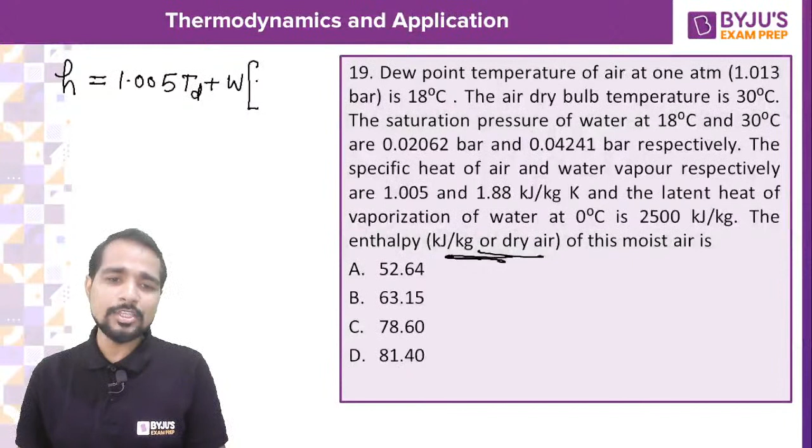like this: 1.005 into TD. TD means dry bulb temperature, plus W. W means humidity ratio, and this is 2500 plus 1.88 TD. This formula we have already written. So to calculate the value of total enthalpy, first of all calculate what is the value of this value.

This humidity ratio can be written like PB minus PV. So in this case, this is 0.622 divided by, PV is equal to, PV means already I have given to you that at dew point temperature, the pressure is PV, that is 0.02062. And again, what is the barometric reading?

This is the barometric reading now. What is the barometric? 1.013 minus what is PV? We have already written 0.02062. So if I calculate, I'll calculate W from here.

I'll substitute the W and TD in degree centigrade. Remember this point, TD in degree centigrade, that is 30. That is also 30. Then you will substitute W here. Then I think you will get the answer like this. That is, what is the right answer?

Surya, Parvinder, what is the right answer? What is the right answer?

I have not calculated this answer. You need to apply both these formulas, and you need to write what is the exact answer. According to Parvinder, B is the answer. Okay, according to Parvinder, B for Bombay is the answer.

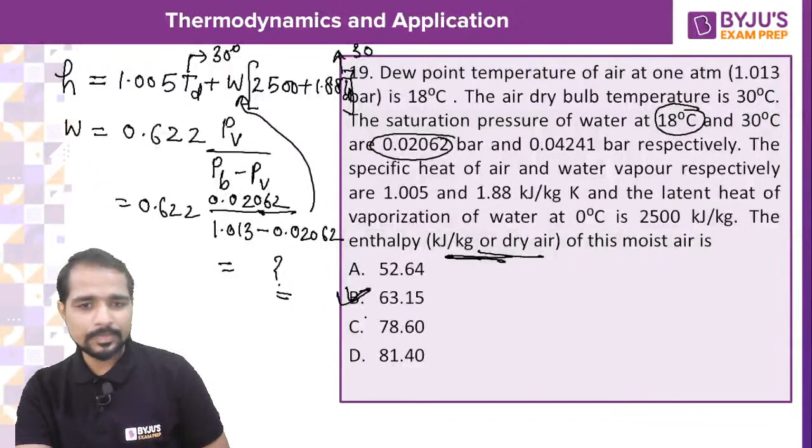Okay, 19. Yes, this is the last question. This question is again homework. Most twisted question, this type of question was also asked in ESE exam this year. Okay, Parvinder, according to Parvinder, previous question answer I have also given.

I'll calculate. I'll share the entire solution in the Telegram channel. Yes, what is the correct answer of this question? What is the correct answer of this question?